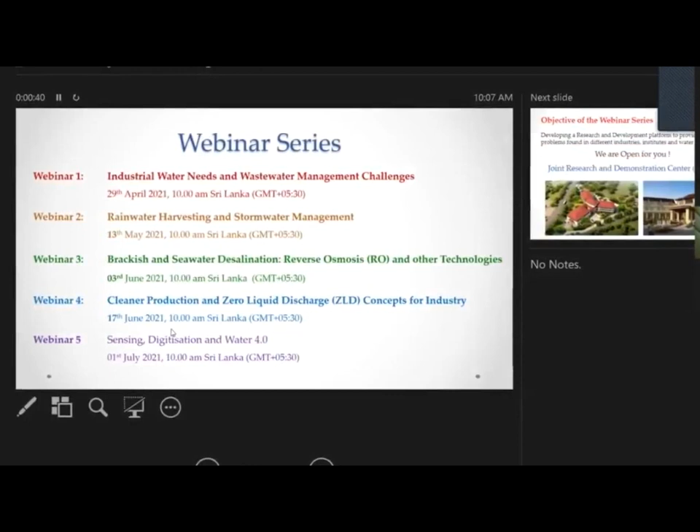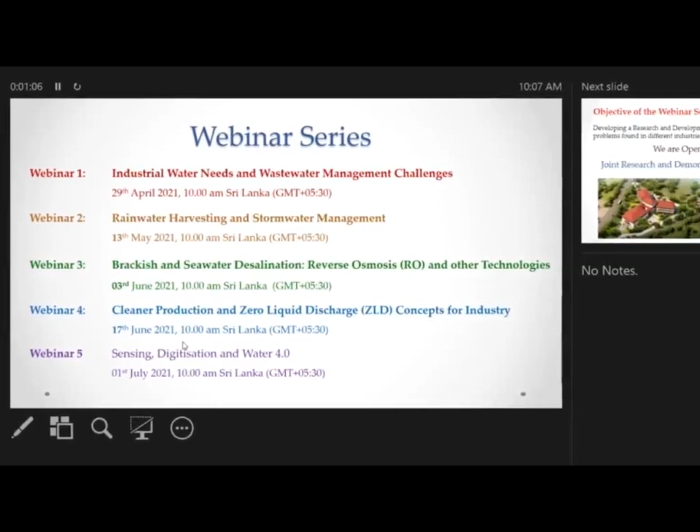So we have 5 webinar series: industrial and wastewater management challenges; rainwater harvesting and stormwater management on 13th May; the 3rd of June, brackish and seawater desalination, reverse osmosis, RO and other technologies; the 17th June, zero liquid discharge concepts for industry; and the last webinar will be on sensing, digitization and water. We highly appreciate all of your participation for this upcoming and today's webinars.

So we have a very big objective. This webinar series was organized to develop a research and development platform to provide solutions for the problems found in different industries and institutes in the water sector. We know that there is a huge gap to fulfill that reach. I'm glad to say that the Joint Research and Demonstration Center is now open at the premises of the University of Peradeniya. So I'll go through some of our facilities. It has different facilities for technology development, conferences, as well as advanced laboratories.

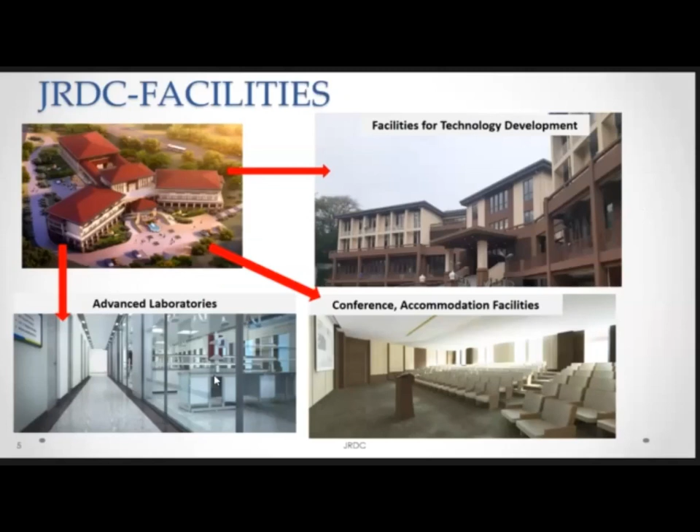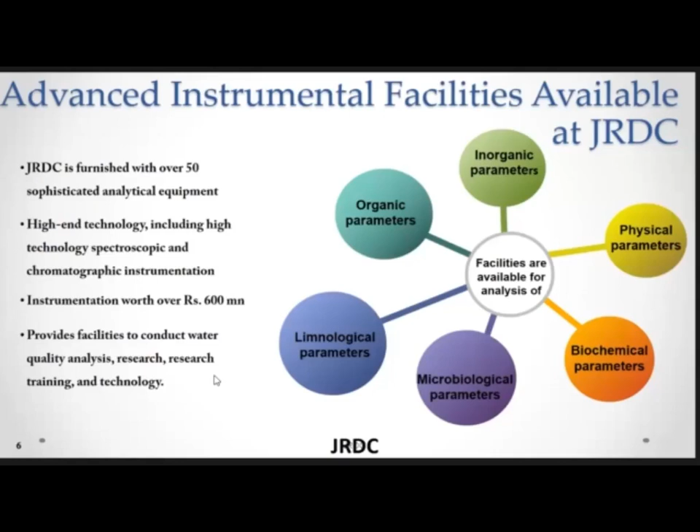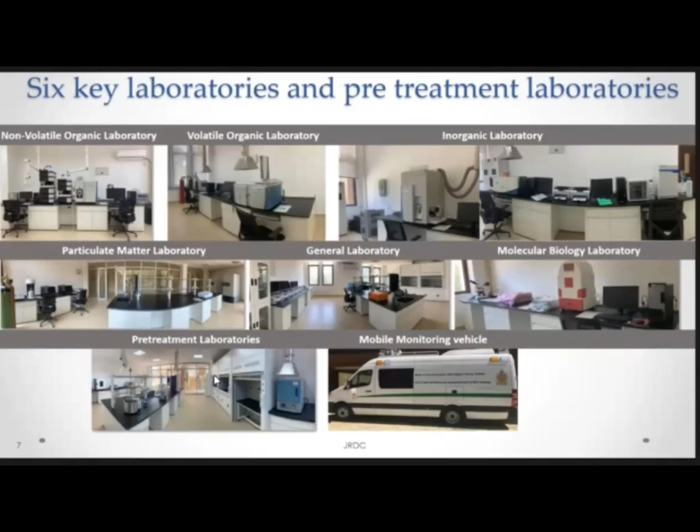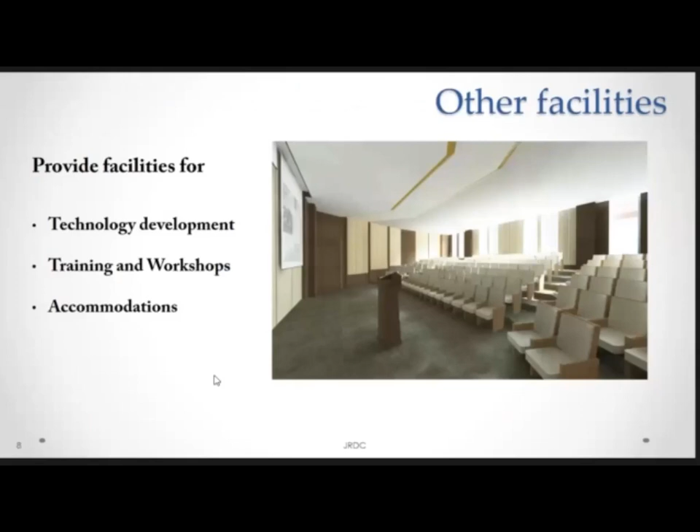So I'll go briefly. This instrument is worth more than 600 million, and it is high-end technology for all the water quality parameters, and we can develop some technologies with you. So I would like to welcome all to participate in this JRDC. We have a volatile organic laboratory, an inorganic laboratory, as well as some other facilities for your use, as well as accommodation, available for your participation.

So I'll briefly describe the program, industrial water needs and wastewater management. Tools to implement integrated industrial water management will be delivered by Professor Jegatheesan from the university, and thereafter application of membrane bioreactor in industrial wastewater treatment will be delivered by Professor Yang Sung Wei, Director of Water Pollution Control, China, and the panel discussion will be held by Dr. C.S. Kalpage, senior lecturer in University of Peradeniya. So I would like to cordially invite Dr. C.S. Kalpage to moderate the session.

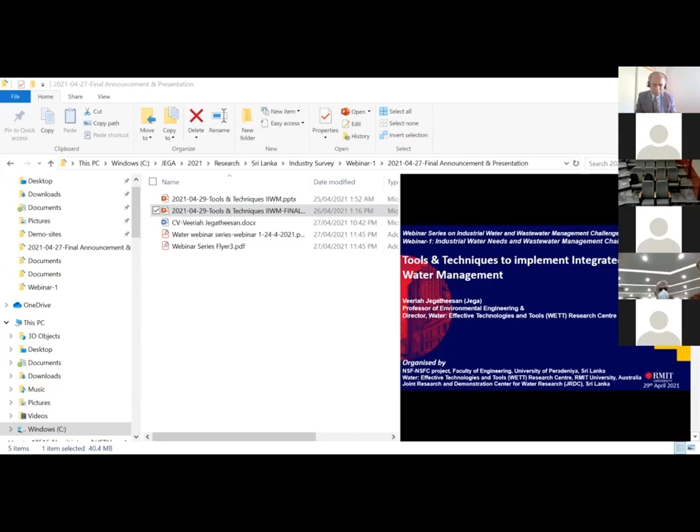Thank you for attending the first webinar of a 5-part webinar series on industrial water and wastewater management, challenges and solutions. My name is Veeriah Jegatheesan. I am a professor of environmental engineering and the director of Water Effective Technologies and Tools, WETT Research Centre at RMIT University in Melbourne, Australia. I would like to share an overview on the tools and techniques available to implement integrated industrial water management and wish to listen to your views, needs, and future plans.

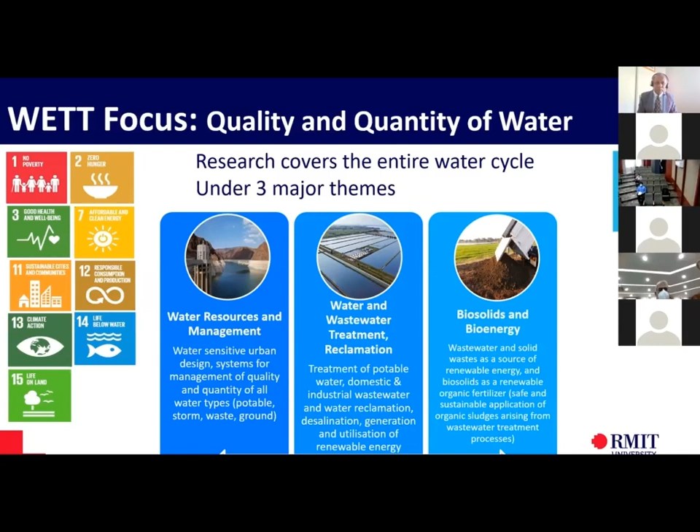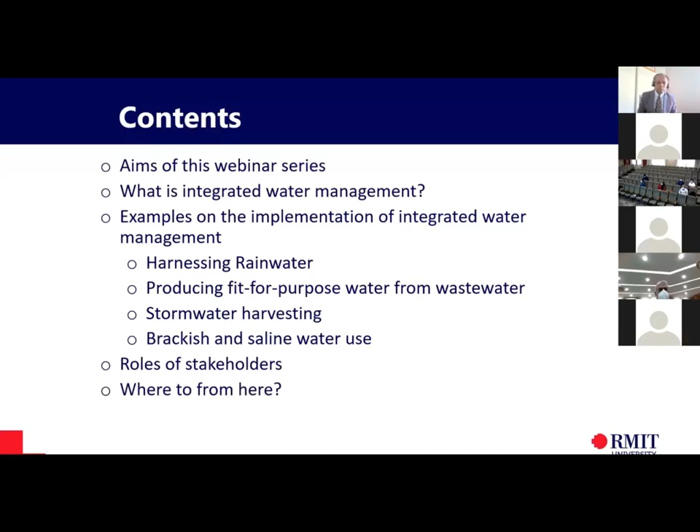The presentation will briefly cover the aims of the webinar series. It will then define what is integrated water management and provide examples on how to implement integrated water management. The roles of the stakeholders and future plans also will be discussed. The aims of this webinar series are knowledge sharing, generating dialogues between industries and universities, leading to collaborative plans and actions for a sustainable future. The webinar series will cover water and wastewater management, rainwater and stormwater harvesting, desalination, cleaner production and zero liquid discharge, sensing, digitization, and water 4.0.

Let us define integrated water management. A simple definition is utilizing all the alternative water resources in a sustainable manner to preserve the fresh water for current needs and for the future generations. Then what are the alternative water resources? Rainwater, treated wastewater, stormwater, brackish and saline water. While doing so, we also make sure to recover resources such as nutrients, salts, and energy from the waste streams.

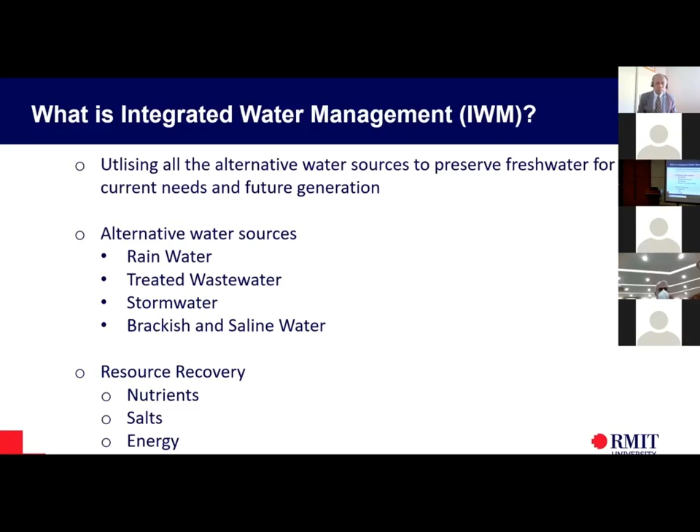Let us look into the first alternative water source, the rainwater. These are the statistics for Australia. 274 billion liters of rainwater can be harvested annually. 26% of households capture 177 billion liters of rainwater, which is 9% of the residential water and worth 540 million Australian dollars. Regional areas, of course, capture more rainwater. In Sydney and Melbourne, rainwater harvesting and water efficient appliances contribute 80 gigaliters and 55 gigaliters of water respectively. These data demonstrate that rainwater harvesting is the first and most efficient element of an integrated water management system.

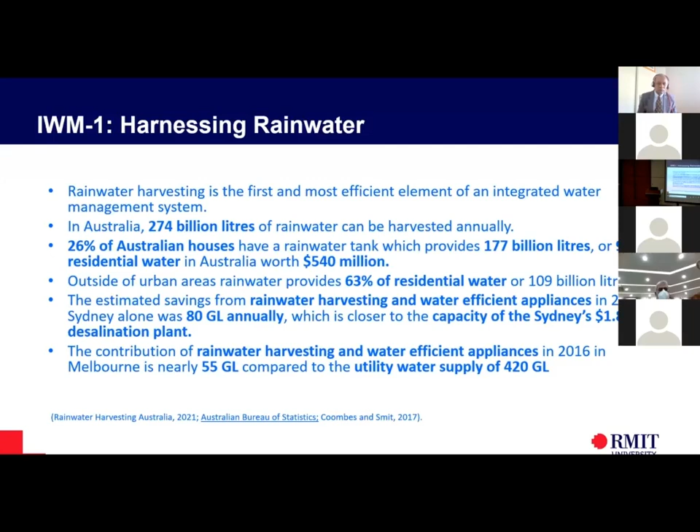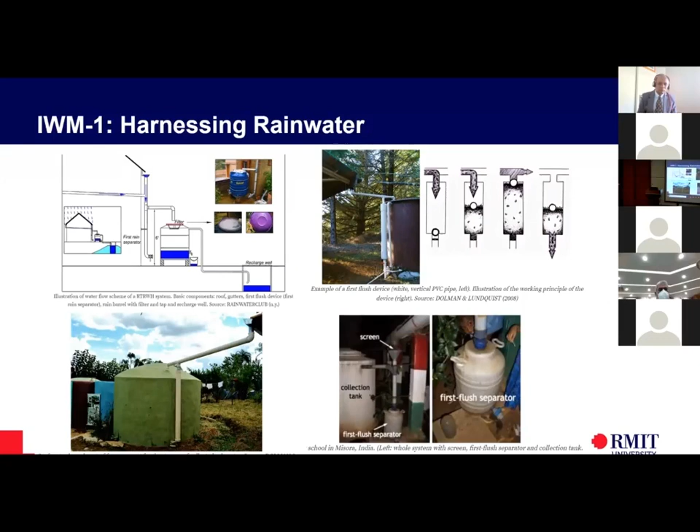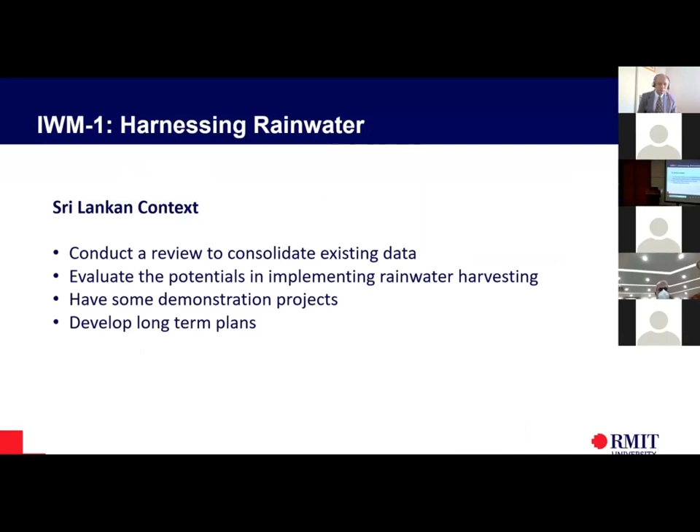These are typical illustrations of capturing rainwater from roofs with simple first flush systems to remove the debris carried by the rainwater at the beginning. All the industries should seriously consider utilizing this option. What could we do in Sri Lanka? I can put forward some suggestions, but we would like to hear from you more on this. Some suggestions are: conduct a review to consolidate existing data, evaluate the potential in implementing rainwater harvesting, have demonstration projects, I will show an Australian example later on. Develop long-term plans, including policies, regulations, etc.

Let us move on to our second alternative source, treated wastewater. Most of you will be familiar with this type of process flow diagram. By treating wastewater to different degrees, we can produce different classes of water fit for different purposes. This will also reduce the treatment cost. Water utilities managing domestic wastewater treatment plants are ideally placed to tap into this resource.

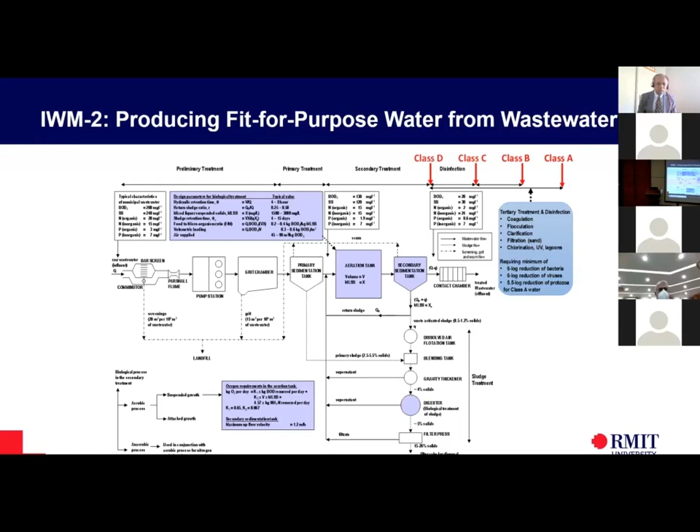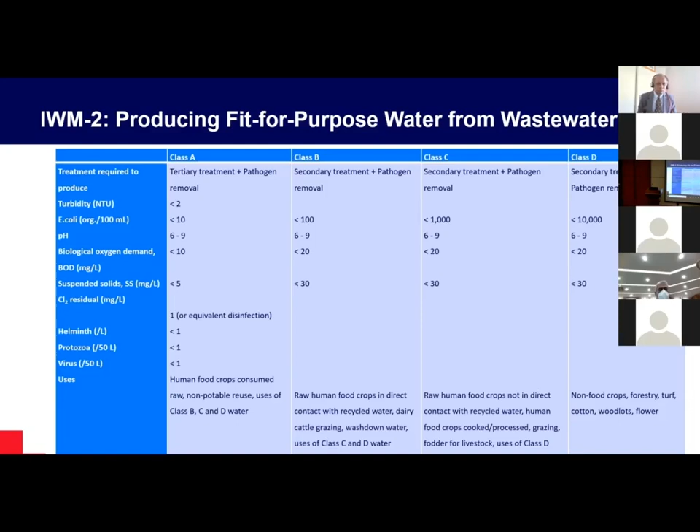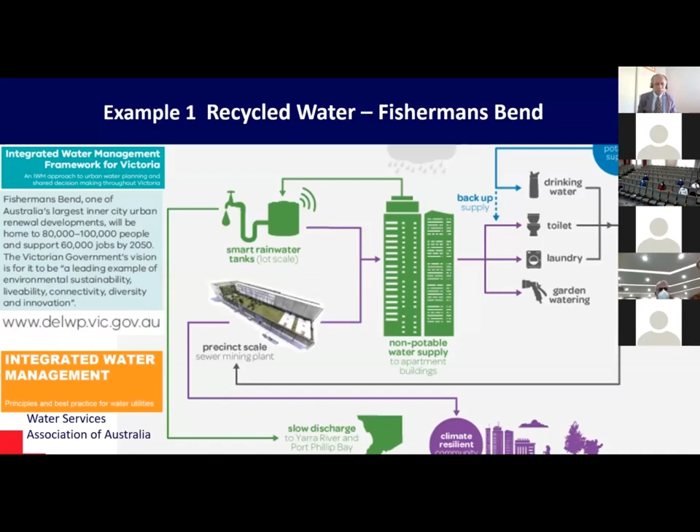We have experience in developing treatment systems to reuse treated effluents from car wash stations, aquaculture farms, mine tailings, etc. Membrane bioreactors can treat wastewater with organic pollutants and can produce Class A water. For example, car wash stations in Australia can produce 35 billion litres of wastewater per year, and if it can be treated and reused, around 77 million Australian dollars can be saved from treatment costs.

Similarly, a zinc mine producing 900 cubic meters of tailing effluent a day can have chemical treatment followed by membranes to produce recyclable water and minerals. The payback period for a treatment plant to have such outcome can be only a few years. Therefore, it's only a matter of identifying industries which can benefit from the use of treated wastewater and finding appropriate treatment systems to produce fit-for-purpose water.

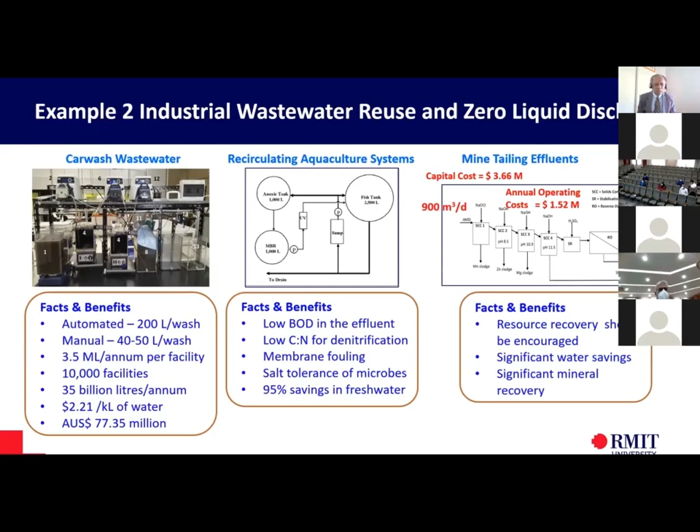We had an opportunity to work with Tamil Nadu Water Investment Company, which is operating recycling plants in Tirupur to treat textile effluents. As you may know, Tirupur is considered as Textile Valley. 922,000 cubic meters per year of wastewater generated from 200 textile industry units are treated by 9 effluent treatment plants to produce recyclable water and brine solutions.

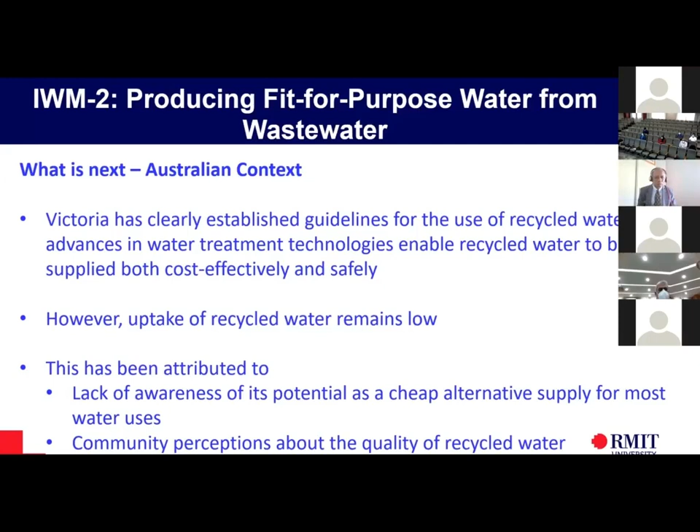Victoria has clearly established guidelines for the use of recycled water, and it has treatment technologies that can enable recycled water to be supplied both cost effectively and safely. However, the uptake of recycled water remains low due to the lack of awareness of its potential as a cheap alternative supply for most water uses, and also the community perceptions about the quality of recycled water. What is next in the Sri Lankan context with respect to producing fit-for-purpose water? We would like to hear from you.

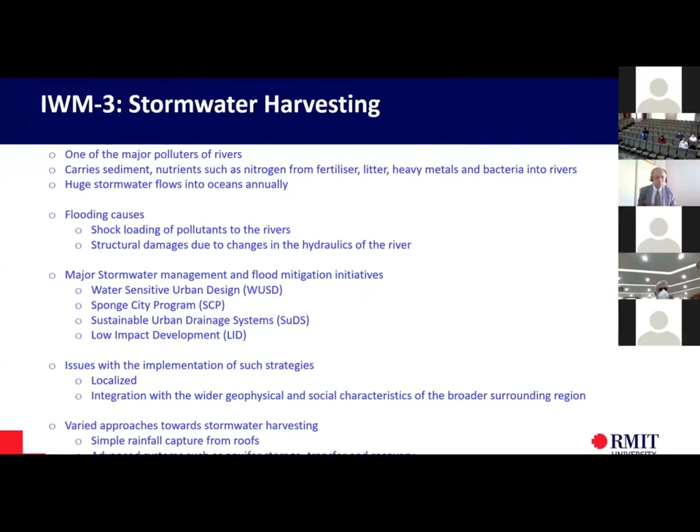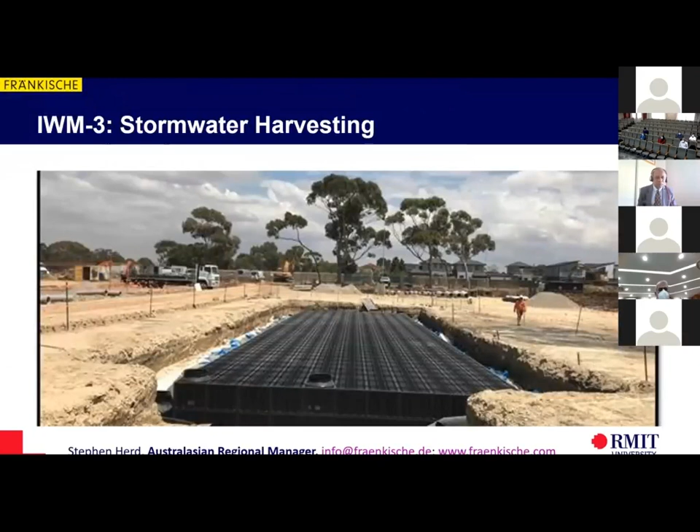We know the perils of stormwater and flooding. However, we have techniques to manage stormwater through water-sensitive urban design, sponge city designs, sustainable urban drainage systems, and low-impact developments. We also have expertise to harvest stormwater. These are latest developments to transport, treat, store, and discharge stormwater. Captured stormwater can be treated by a series of media filtration to remove phosphorus, metals, nitrate, E. coli, and organic matter before being recharged to aquifers.

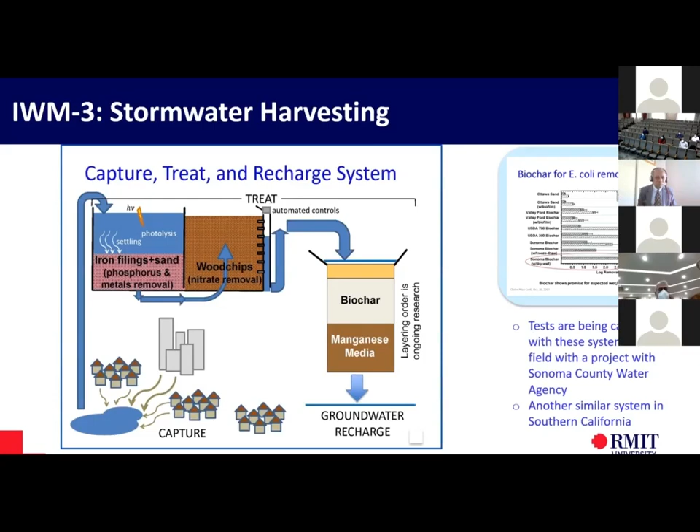In the Australian context, population growth and urbanization are going to increase the impact of stormwater and flooding. Therefore, working with natural processes to improve the ecology of water bodies is considered as an important aspect. Developing treatment techniques to remove emerging pollutants, improving the performance of nature-based systems such as wetlands, developing policies to encourage public engagement, and revisiting existing regulations are underway in Australia. What do you think we need to consider in the Sri Lankan context?

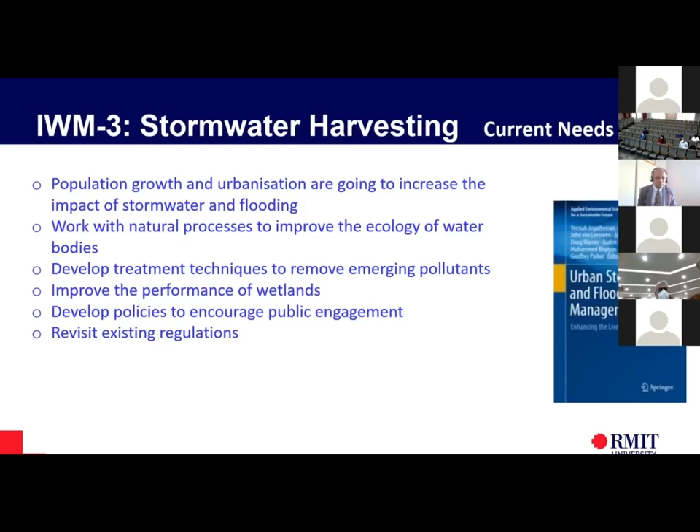Let us move on to our last alternative resource, brackish and saline water. The total dissolved solids, termed as TDS, of brackish water is between 1,000 and 10,000 milligrams per liter. TDS of saline water is more than 10,000 milligrams per liter. Seawater TDS is around 35,000 milligrams per liter.

Membrane desalination is already being used in Sri Lanka in various scales to obtain fresh water from saline or brackish water. Reverse osmosis and nanofiltration membranes are being used, although challenges in concentrate management are not completely solved. However, designing and installing desalination systems are quite easy and will improve the water supply to industries situated along the coast.

Recovering salt from the brine can even make the operating costs negative in medium and large scale desalination plants. A study shows that a large scale reverse osmosis plant with 25,200 cubic meters per day of feed flow, if operated with nanofiltration followed by reverse osmosis as well as crystallization, will have 92% water recovery, produce 19.5 kilograms of salt per cubic meter of feed, and have negative $0.49 to negative $0.68 per cubic meter of water operating cost.

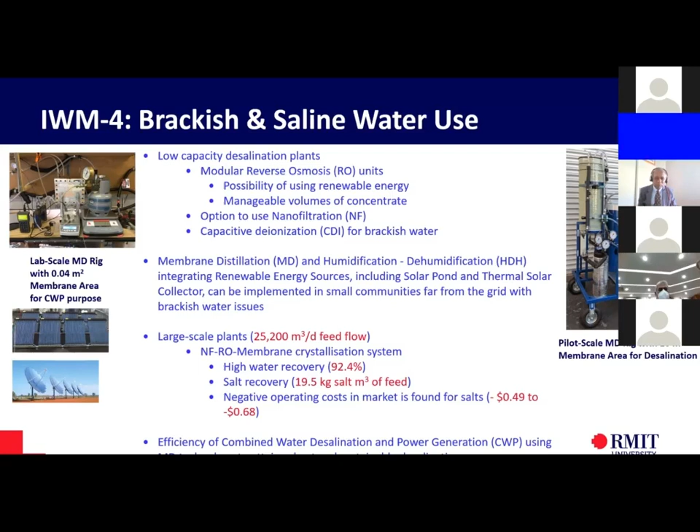These types of information are quite valuable for industries aiming at circular economy. In the Australian context, desalination is considered as a source providing additional water security for various purposes. So what is next in the Sri Lankan context? Again, we would like to hear from you.

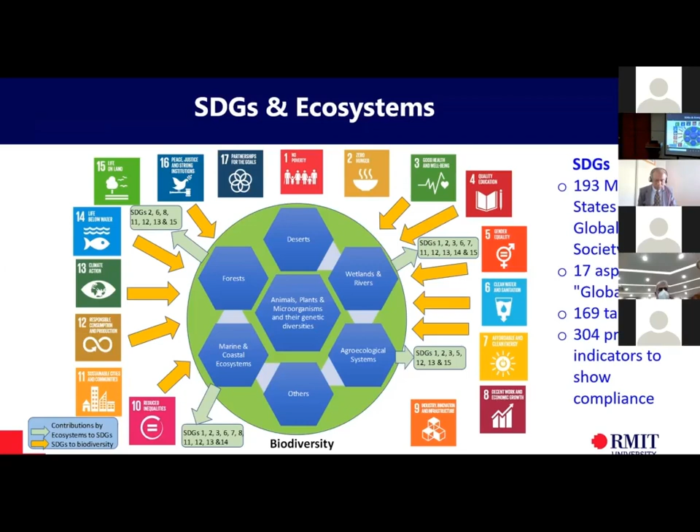When the water is safe and secure, we preserve the health of many ecosystems, such as wetlands and rivers, marine and coastal, forests and agricultural, and thereby maintain the biodiversity of those ecosystems. If we observe very carefully, ecosystems and their biodiversities are the essence of our life.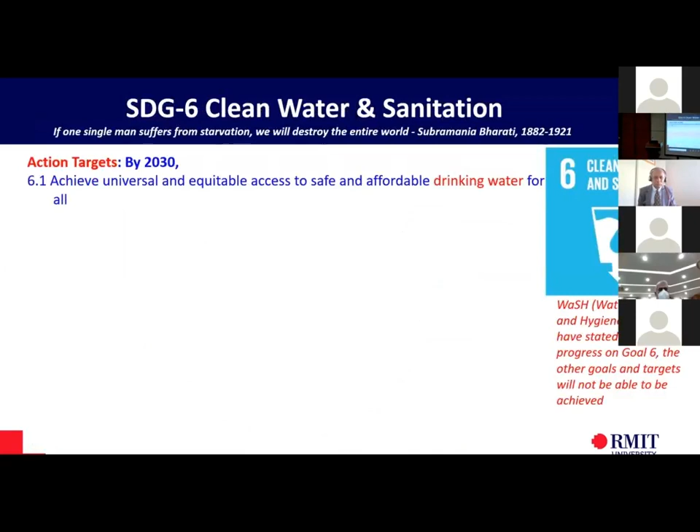So I think it will be fitting to conclude my presentation by going through the Sustainable Development Goal 6, water and sanitation. It has 6 action targets on drinking water, sanitation and hygiene, water quality, water use efficiency, integrated water resource management, and water-related ecosystems. It also has 2 implementation targets. One is international cooperation and the other one is participation of local communities.

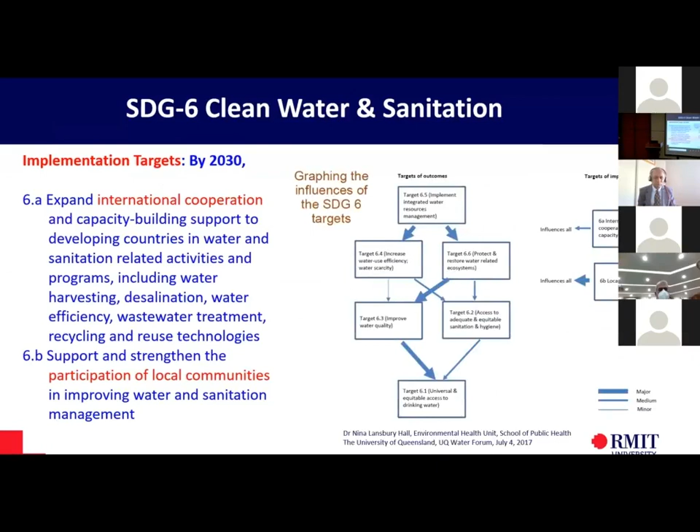The graph shows integrated water management contributes either directly or indirectly to all other targets of SDG 6. Our consortium looks forward to collaborating with you all. Please feel free to provide your comments and needs. Our collaboration should contribute to make Sri Lanka a model island that excels in integrated water management.

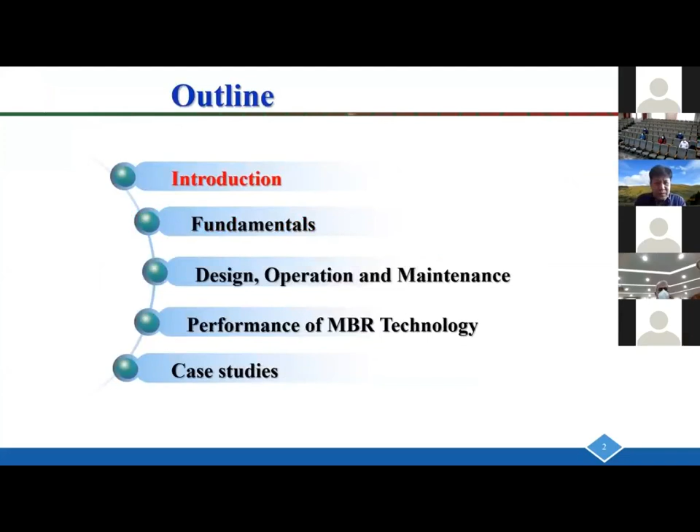For the membrane bioreactor, maybe lots of people know this, but Professor Xiaomin told me there are a lot of people from the industry, so I will briefly introduce the MBR. As we know, the membrane bioreactor is a very cost-effective technology for municipal wastewater treatment and industrial wastewater treatment. Generally, the membrane is used to replace the sedimentation of the conventional activated sludge process.

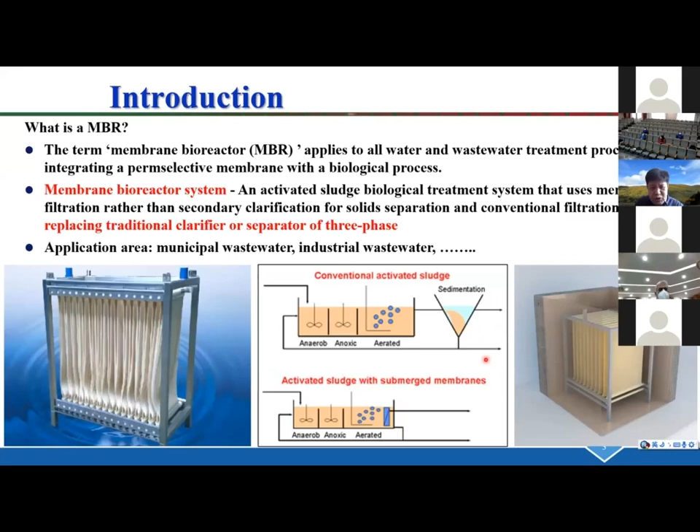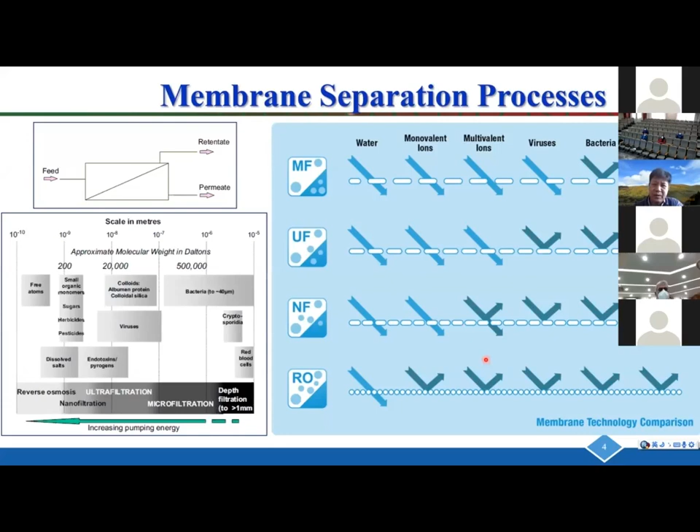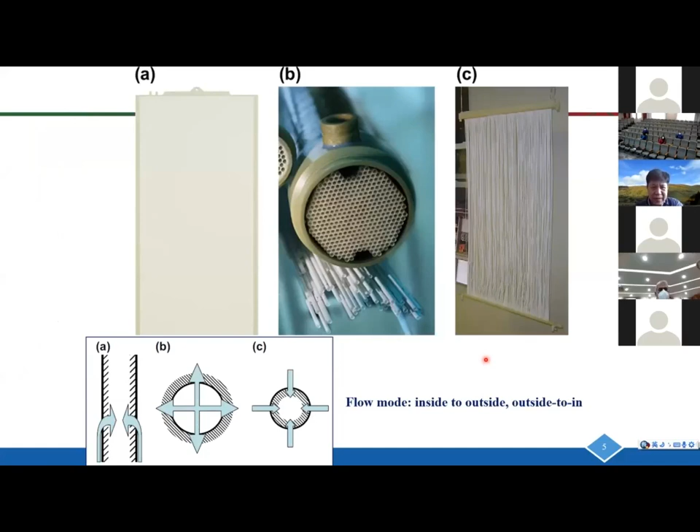For this membrane separation process, there are different membranes, like microfiltration, ultrafiltration, nanofiltration, and RO. Generally, MBR uses microfiltration and ultrafiltration membranes. In China, the ultrafiltration membrane is often used. There are different membranes, like the flat sheet membrane, tubular membrane, and hollow fiber membrane. So it is coupling the biological and physical units.

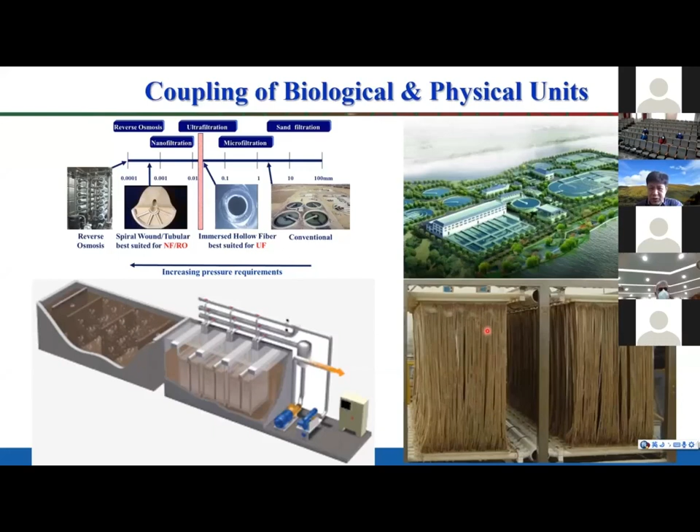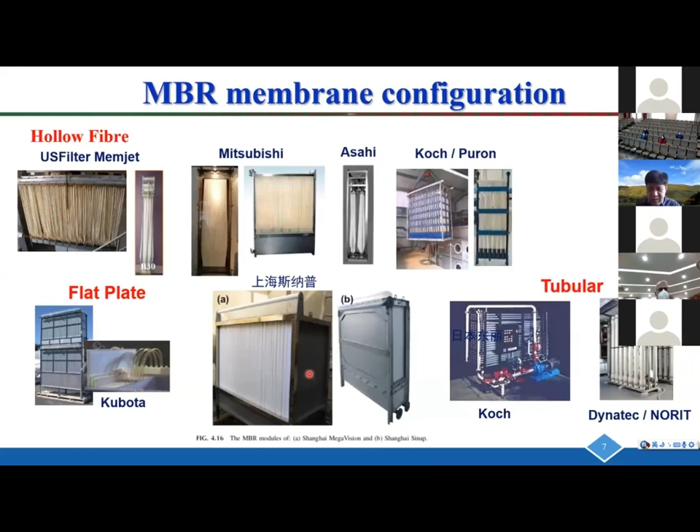This figure shows the wastewater treatment plant, the biological process combined with the membrane separation. This picture shows the hollow fiber. There are also lots of membrane configurations from different companies and countries, like the hollow fiber, something like the noodle hollow fiber, the flat sheet from Kubota, a Japanese company, and this is the tubular.

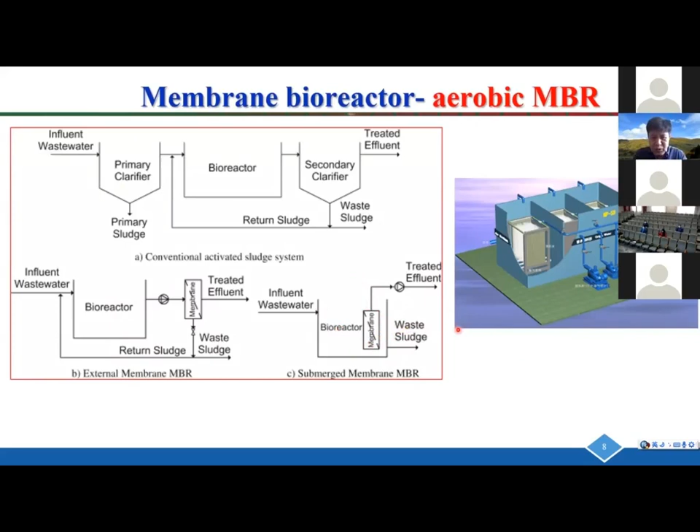We often mention the MBR, membrane bioreactor. What is MBR? Generally there are two kinds of MBR. One is the aerobic membrane bioreactor, which has two different types. One is the side stream, where the membrane is outside the bioreactor. The other one is the submerged membrane bioreactor, where the membrane module is submerged into the bioreactor. The submerged membrane bioreactor is the most used MBR type.

People also develop other new technology. The anaerobic membrane bioreactor is similar to the aerobic membrane bioreactor. People use the membrane to replace settling, improving the anaerobic digestion performance. This technology is now paid more and more attention in the world, especially for high strength organic wastewater treatment. There are different types of anaerobic membrane bioreactor. In the following presentation, I will focus on the aerobic membrane bioreactor.

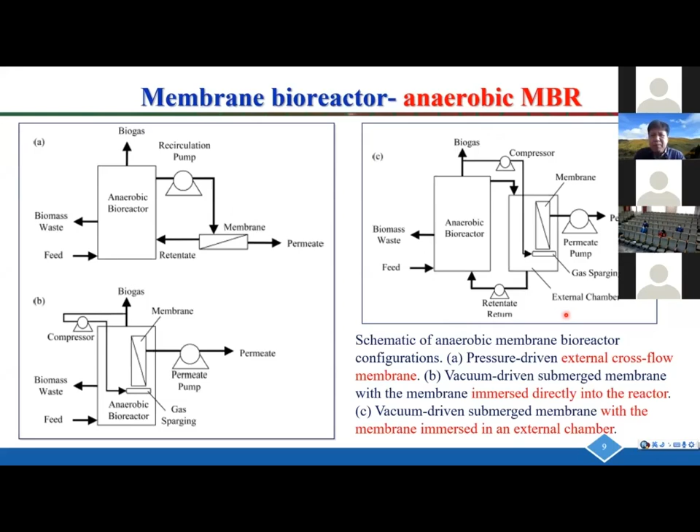This is the process for the wastewater treatment. In full scale MBR, the bioreactor and the membrane tank are separated for operation and maintenance purposes, because this is very easy to operate and maintain. So why do people choose MBR? MBR has lots of advantages, but also some disadvantages. The most important advantages are the higher quality of effluent, the smaller footprint, and easy operation and maintenance. With increasing discharge standards, people realize MBR may be one of the best technologies for wastewater treatment and reclamation, especially in urban areas with rapid urbanization.

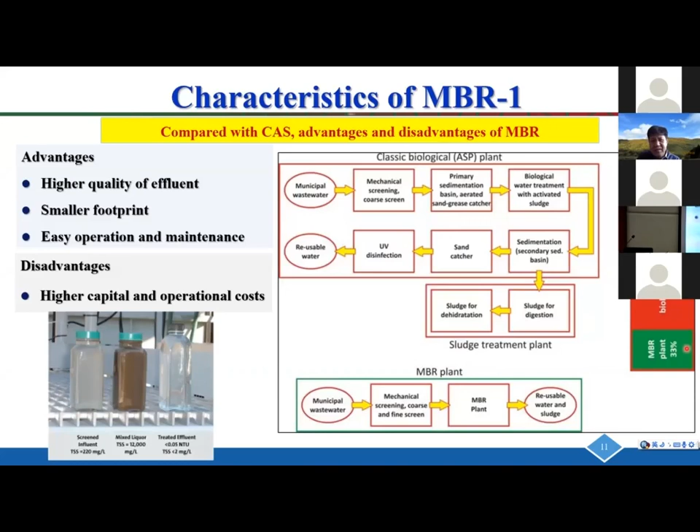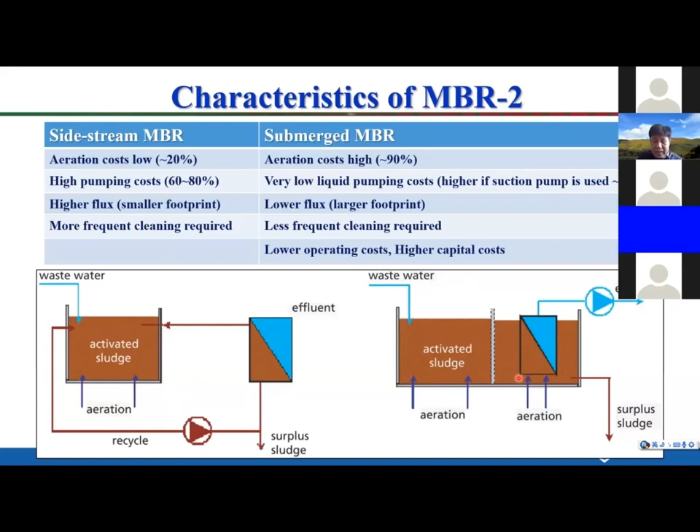There are side stream MBR and submerged MBR. Generally, people use the submerged MBR, especially in municipal wastewater. But for industrial wastewater, people will use the side stream MBR. But generally in China, the submerged MBR is commonly used in municipal wastewater treatment and industrial wastewater treatment.

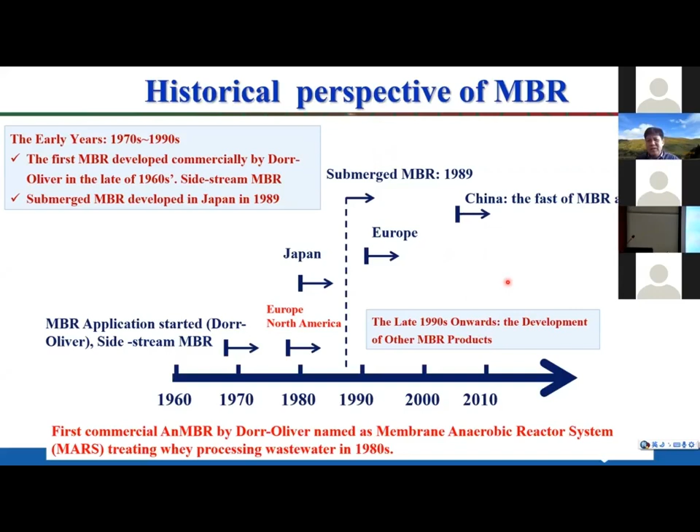This is the history of MBR. Here we can show you MBR technology development in the world. Since 1989, the submerged MBR occurred, and since then its wide application became true. Since 2001, when China won the bid for the Olympic Games in 2008, MBR application developed very quickly. This is the MBR development history in China.

There are different phases, especially phase 2. Since then, MBR application in China developed quickly. First, it started in industrial wastewater and hospital wastewater. This experience can be shared with Sri Lanka.

Industrial wastewater is difficult to treat by conventional wastewater treatment technology, and compared to municipal wastewater, the industrial wastewater treatment capacity is small. So maybe the Sri Lanka side can also start from industrial wastewater and hospital wastewater, and then spread to municipal wastewater. And now in China, to improve water quality, more and more MBRs are applied in municipal wastewater treatment and reclamation.

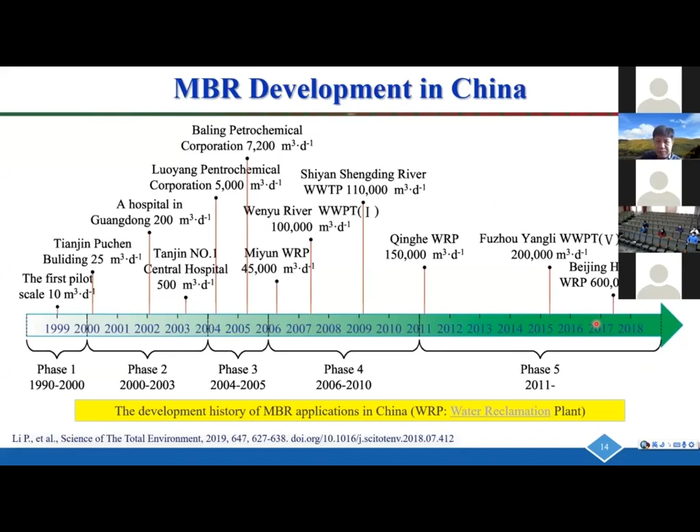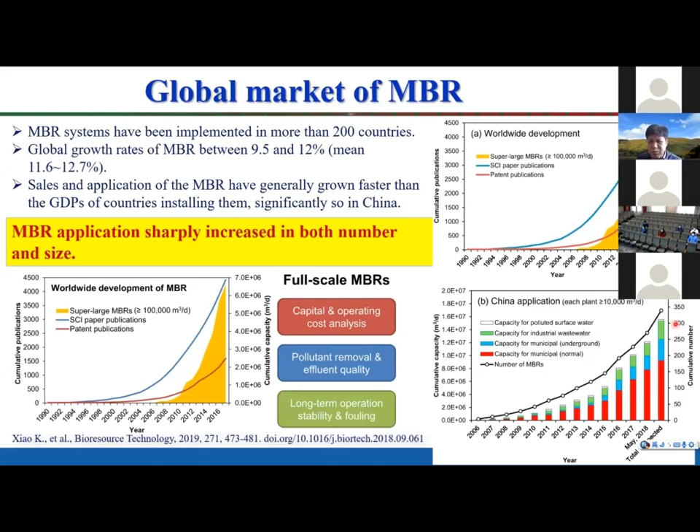This is in China. You can see that the capacity is increasing very quickly. And also for the industrial wastewater it also increases, but most of the increase is in the municipal wastewater treatment and reclamation. So for China, here's the driving force for MBR.

I think for the world, it's a similar legislation: local water scarcity, return on investment, environmental impact, public and political acceptance. But for China, besides these reasons, there's water resource stress, shortage, and public policy and water environment stress. This is the key driving force to push MBR application in China.

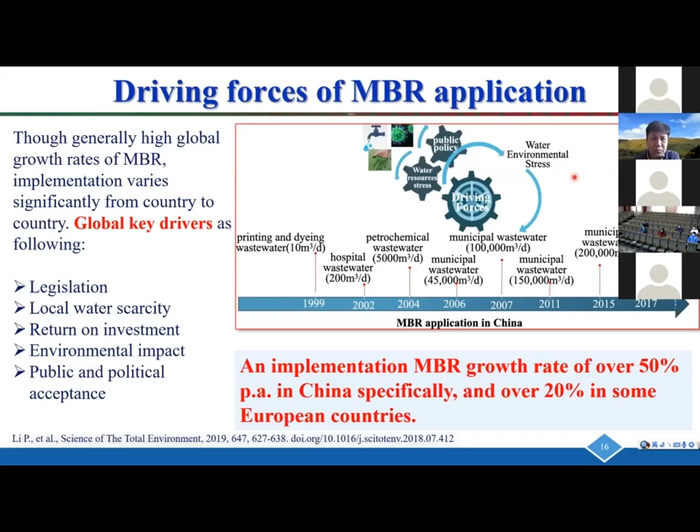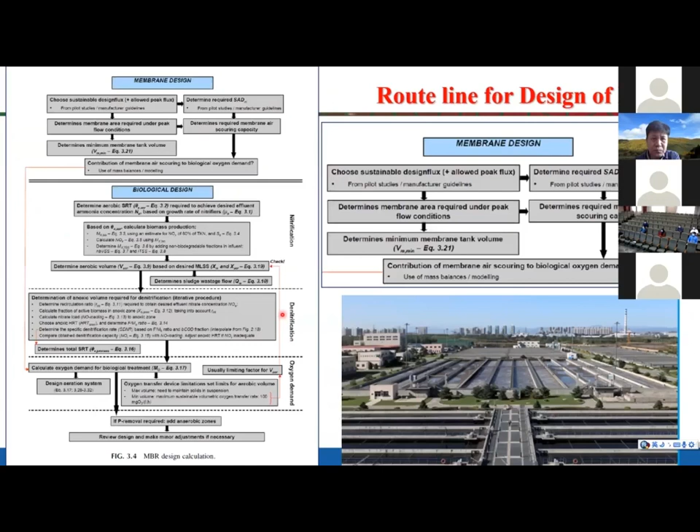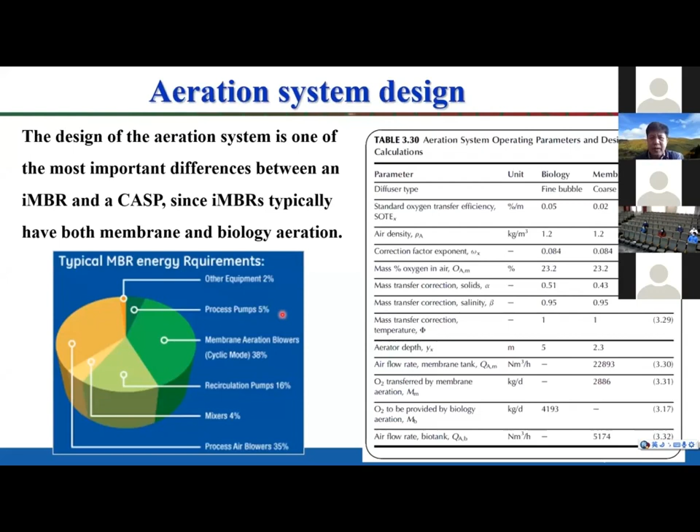So for research, membrane fouling is a very hot topic. For MBR design, mixing is not so difficult now to use with this technology. But for the MBR, there are others for flushing, for scouring, for membrane fouling control. MBR maintenance is very important.

Generally, MBR operation and maintenance is easy, but operators should also pay more attention to membrane fouling, the same as this research topic, because membrane fouling will cause the flux to decrease and also increase the operation cost. This is something about the membrane fouling fix.

So you can see this one, and this is for membrane fouling control. There's different methods, like physical and chemical, on-site chemical clean. This will be done. There are lots of protocols provided by the MBR suppliers.

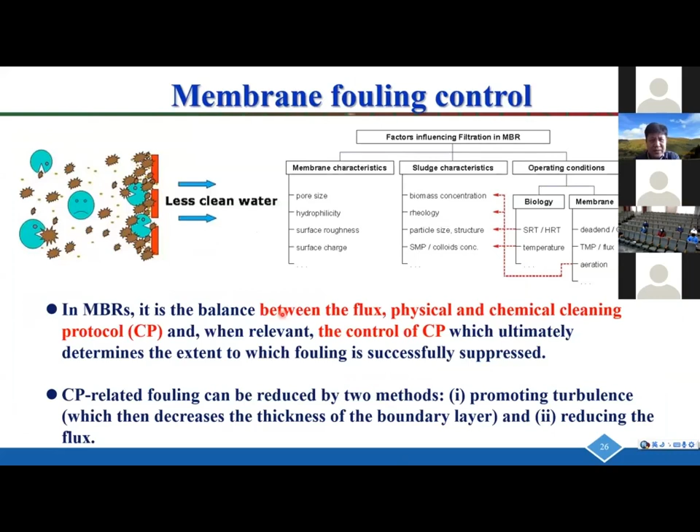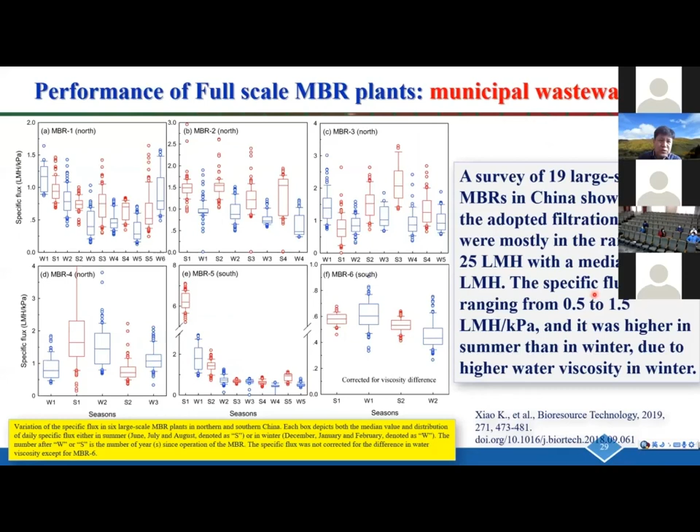But when irreversible fouling happens, then chemical clean is needed. For nitrogen and total phosphorus, generally the effluent quality is very good. So this is influent, this is effluent, and effluent removal rate. Generally the COD removal rate is very high, more than 95%.

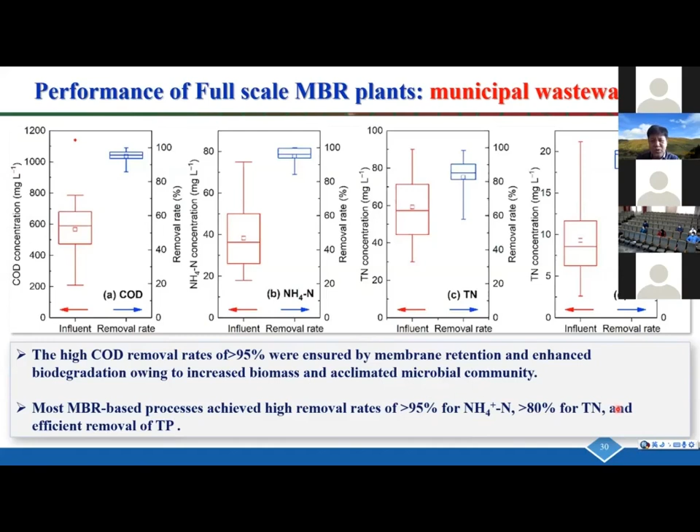For ammonia, it's also good, 95%. But for total nitrogen, it's okay, around 80%. And for total phosphorus, it's also very good. As we know, total nitrogen removal is difficult in municipal wastewater, especially when the carbon nitrogen ratio is low. This is also a big challenge in China, especially in northern China.

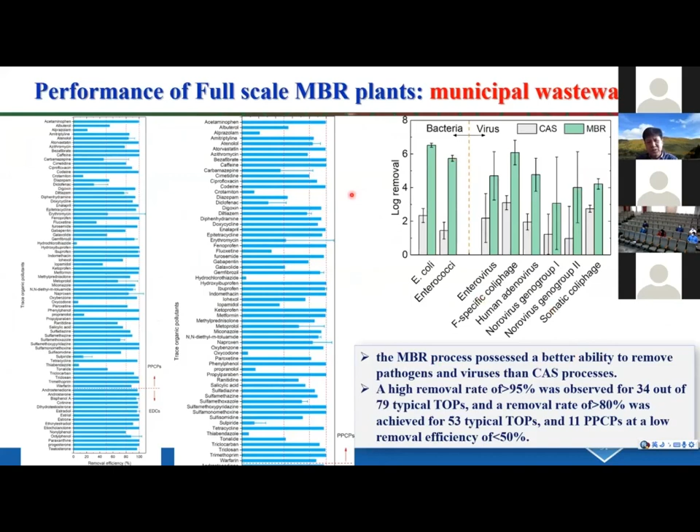MBR also has very good ability to remove pathogens and viruses, especially during this COVID-19 pandemic. Pathogen and virus control is very important for public health. It also has a high removal rate for PPCPs and some EDCs. So that shows this performance.

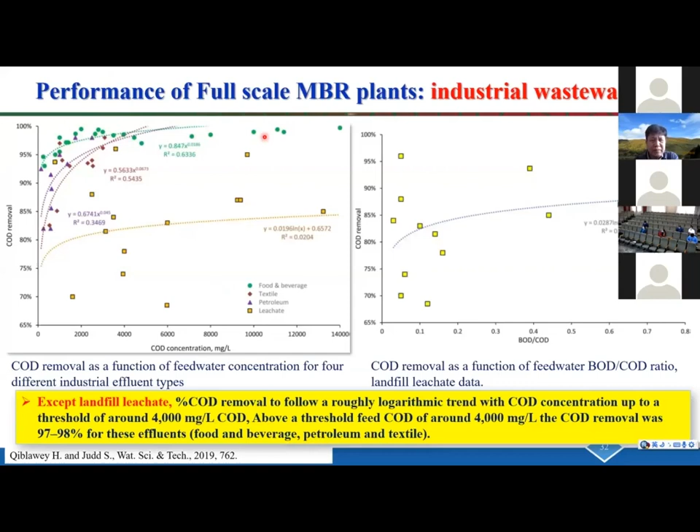We can also see this is for COD removal, and generally for these industries, COD removal is very high in food and beverage, then textile, petroleum, and landfill leachate. I think in Sri Lanka, maybe food processing wastewater could consider using this MBR technology to treat, because this technology is very useful for that.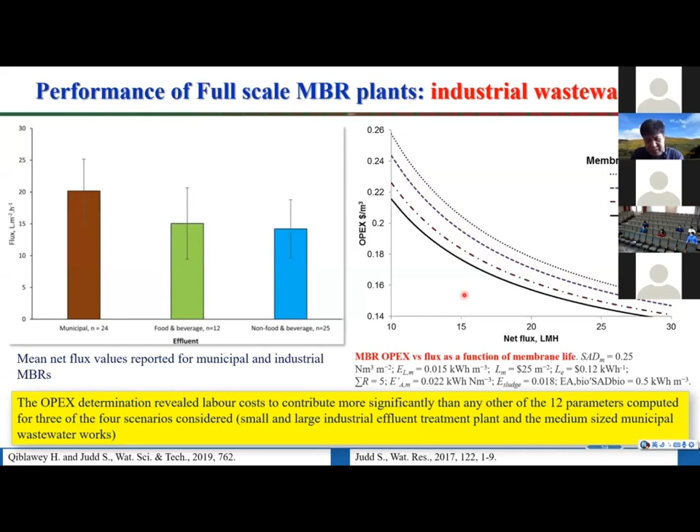This summarization is from the developed countries. Maybe for the developing countries, the labor cost is not a very sensitive factor. This conclusion is for MBR application in the developed countries.

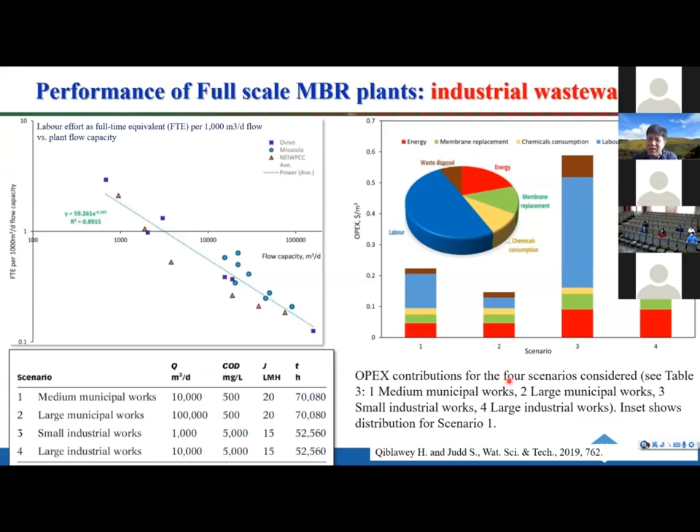We did the analysis for four different scenarios: energy consumption, membrane replacement, chemical consumption, labor, and waste disposal. Among these, labor cost is very sensitive. But for developing countries' MBR application, membrane replacement may have a bigger impact on operation condition. So I will show you some case studies in China.

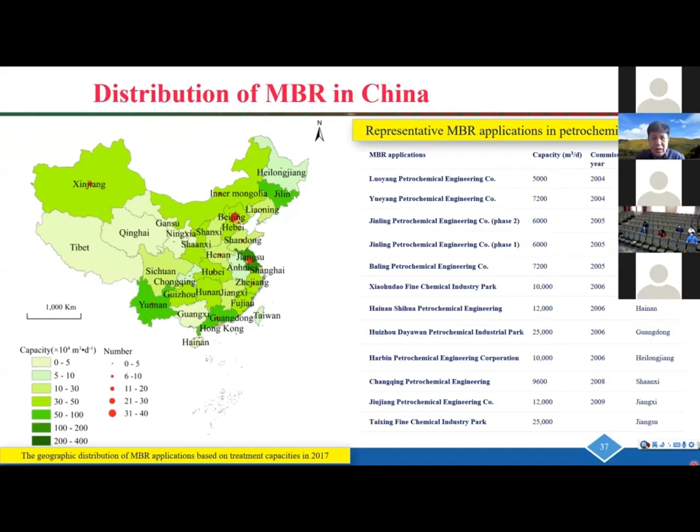These case studies are in China. This shows municipal wastewater treatment around China, and this shows petrochemical industry wastewater treatment. You can see the capacity is different, and this figure shows MBR application in China very clearly. The total capacity by MBR in China is roughly 20 million cubic meters per day.

So MBR is used very commonly in China, in both industrial wastewater and municipal wastewater. This is some of the applications I want to show you.

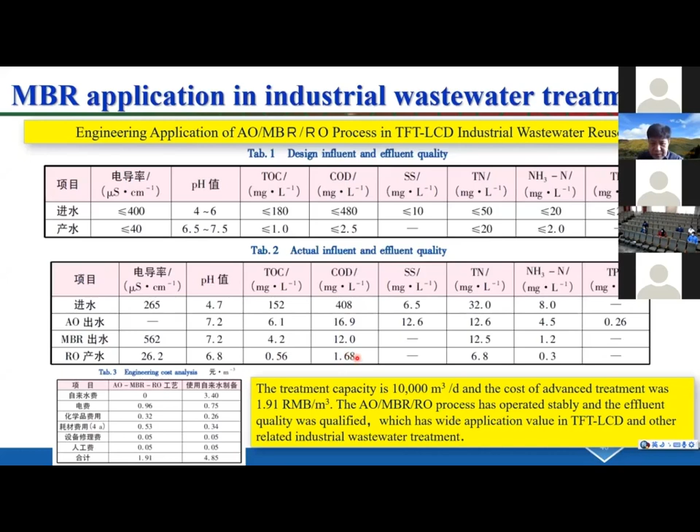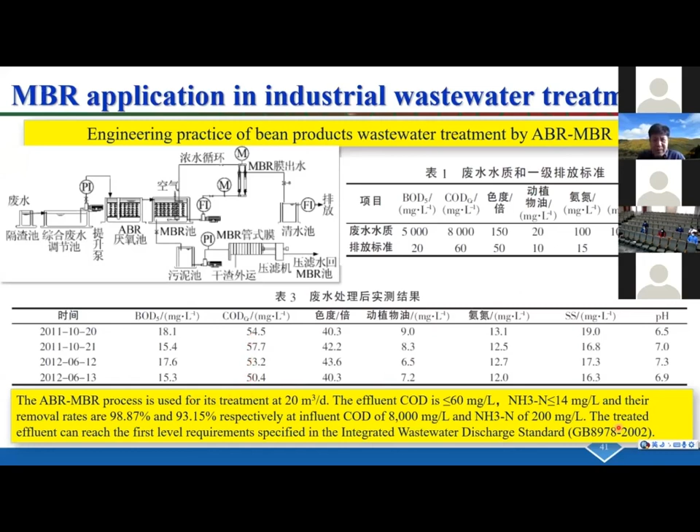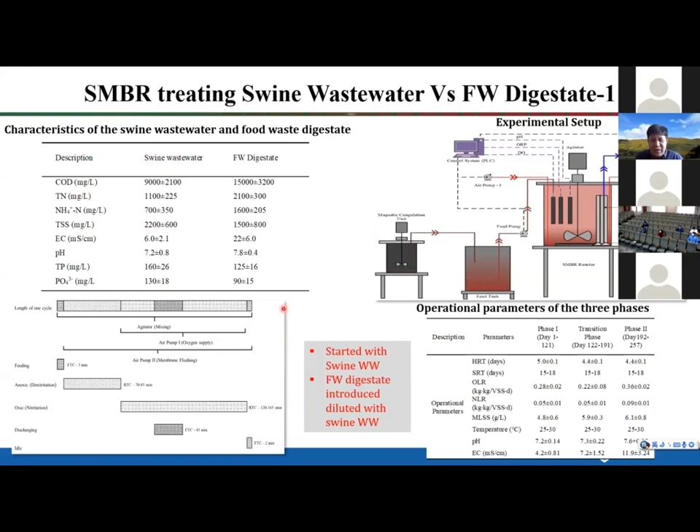These are the operation parameters, and you can see the performance is very good. The COD is less than 400 milligrams per liter, and the ammonia nitrogen is less than 40. Total nitrogen and ammonia are also very low. This process can provide a good shortcut process for swine wastewater and food waste digestion treatment.

This is our result just shown to you, but this is lab scale. I hope in the future we can use this in full scale application.

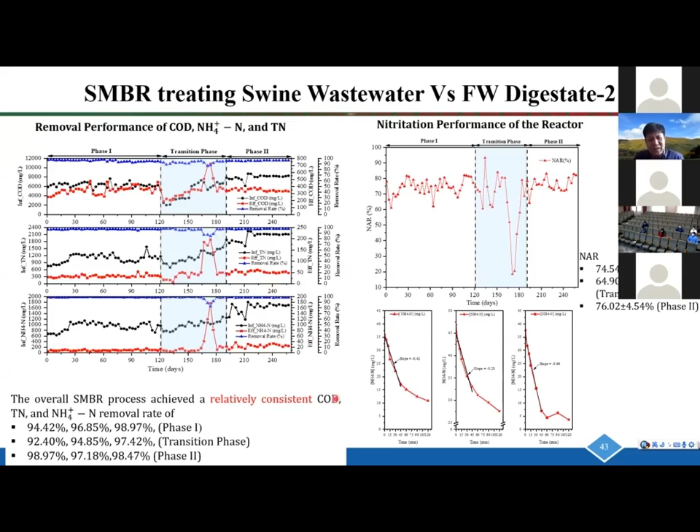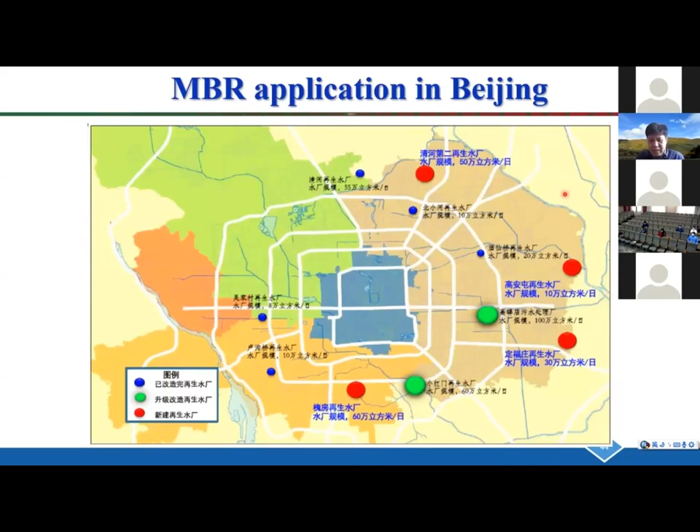We also show you some MBR application in Beijing. This plan shows the application in China, in Beijing. I'll show you one case, a full scale municipal wastewater plant. There are three plants: Plants 1 and 2 use the A2O process, and Plant 3 uses A2O MBR, at 150,000 cubic meters per day.

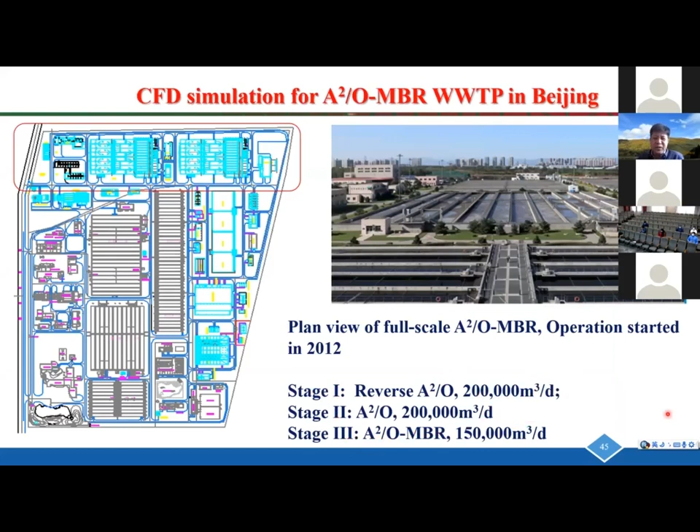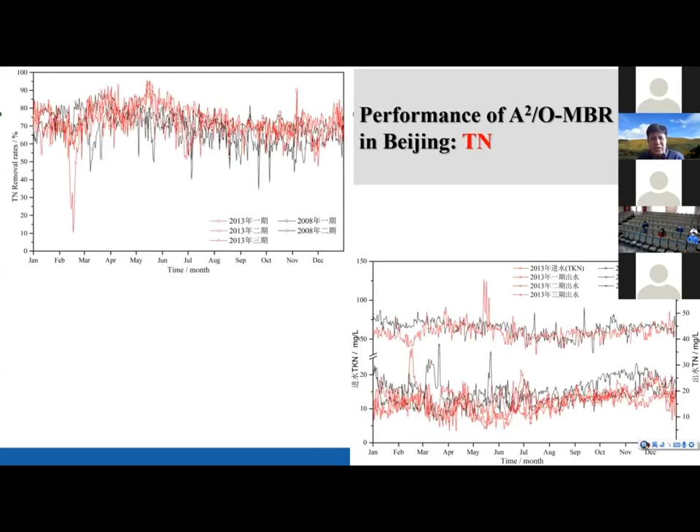We can compare their performance. Generally the COD, total nitrogen, and total phosphorus are better than the conventional process, as shown in this picture. Also for energy capacity, we improved the A2O MBR aeration using a pulse aeration approach, which reduced energy consumption very much.

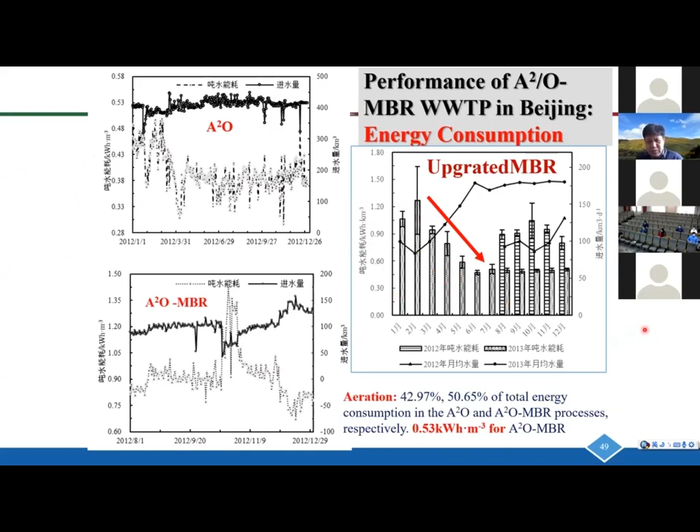We made this investigation, so that is just a brief introduction to MBR technology application in China, especially including municipal wastewater treatment and industrial wastewater treatment.